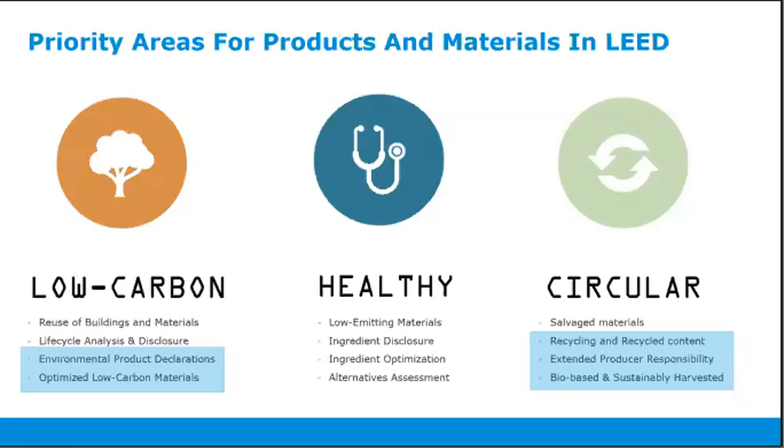Additionally, another way to reduce embodied carbon in a product is by integrating bio-based and sustainably harvested materials. That's not something that we're going to focus on today. That's something that is incredibly advanced, and there are manufacturers working on that. Incorporating bio-based or sustainably harvested materials can help lower the embodied carbon in a product, but it's not always guaranteed.

We'll talk about LEED v4 and 4.1 for just a moment, because this data is absolutely incredible and encouraging at the same time. So understanding that interest in green building has continued to grow over time, we ran a quick analysis just to see what LEED registered and certified products look like from June of 2020 to June of 2021. And what's interesting to see here is that during the heat of the pandemic, when there was a lot of uncertainty and ups and downs within the industry, that's when registered projects for LEED v4 went from around 9,000 all the way up to around 15,000.

And if you look at LEED v4.1, the registered projects between June of 2020 and June of 2021 shows that we went from 620 buildings to almost 4,000 buildings. So we're looking at roughly 9,000 new registrations in a year for LEED projects, which is incredible, especially given the ongoing situation of the world we live in right now.

Something else that's interesting about LEED project teams is that we're seeing a lot more utilization of substitution for credits in v4.1 versus v4. And optimization of products as well as EPDs are two of those key credit substitutions, and we're going to talk about that in some detail.

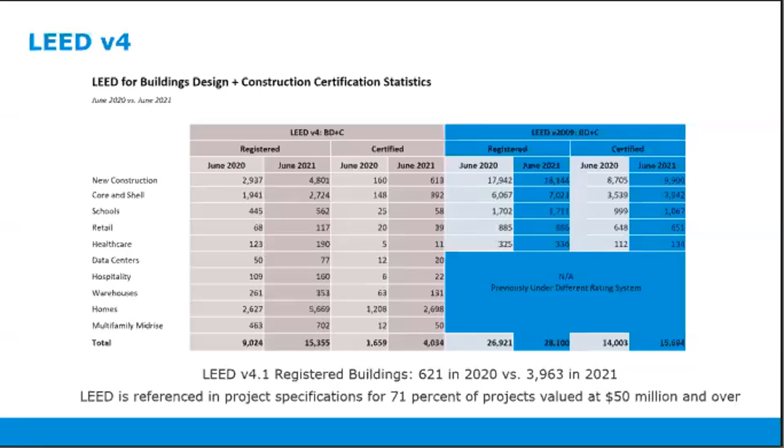So the intention of this course is to talk about embodied carbon, and those that are familiar with this topic tend to be a little bit more advanced as far as LEED is concerned. So we are going to get into some detail in the next couple of slides. It's a lot to take in, so stick with me here, okay? We're going to dive a little deeper into LEED. And these are not your typical LEED v2009 contributions of what we're used to seeing for those past years with 2009. So we're continuing our discussion about driving a more sustainable product.

And this is beneficial because it's encouraging manufacturers like ASSA ABLOY and any other manufacturer within any number of CSI divisions to create environmental product declarations so that architects, designers, and building owners can start to really understand the impacts of products.

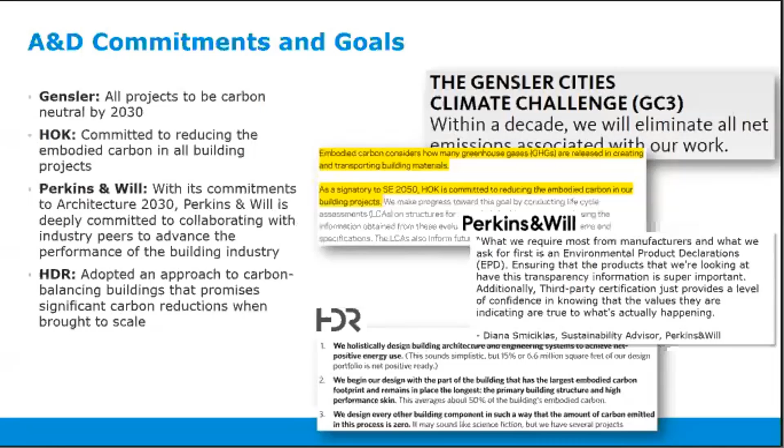And that was from a lot of manufacturers saying, hey, we're starting to do this good work that you proposed to us, and we're answering the call. And so we'd like to make sure that we're collaborating effectively with all of these firms that had asked us to make these positive changes within our products and our processes.

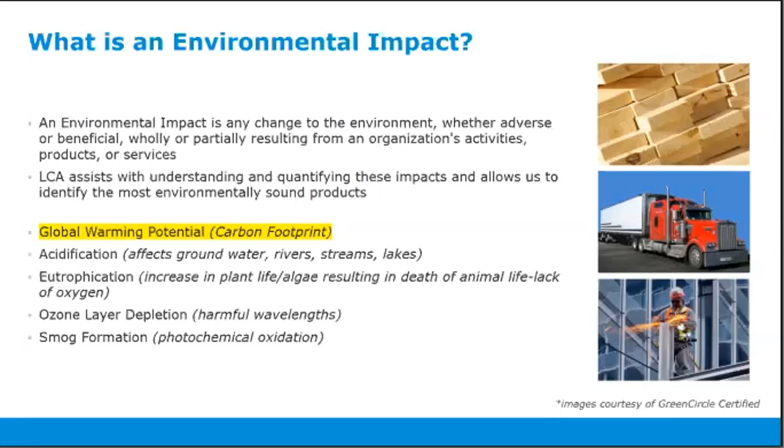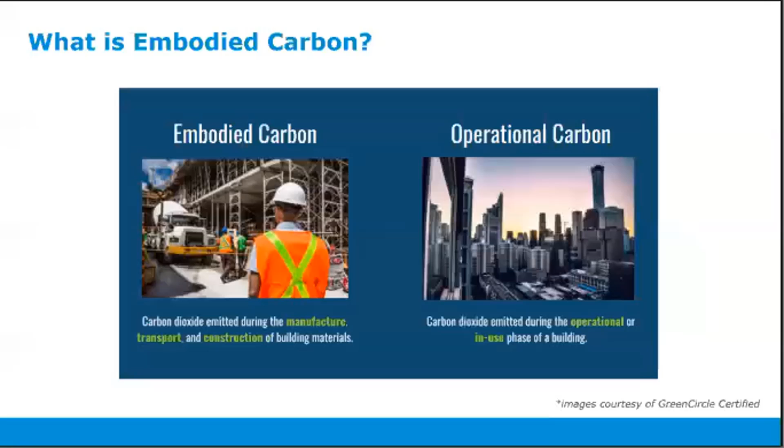So what is embodied carbon, right? We have for a very long time focused on operational carbon, which, especially with LEED, we knew we had to measure the footprint of the building when it's in its operational or in-use phase. And now what we're understanding and what we need to know to move forward to be more responsible is that embodied carbon, or the emissions that come during manufacture, transportation, and construction of building materials, is something that we need to focus on as well, and it can have a very large impact.

So this is a very helpful illustration of the overall life cycle of a building. Depending on the type of role that we have within the project process, we may have a tendency to focus on one more than the other. If you're a supply chain person, your daily focus is on raw materials. If you are an engineer, you're focused more on manufacturing. If you're a building owner, then you're thinking about the product in its use phase.

So everyone's going to serve a different role, but with LEED v4 and 4.1 and a focus on embodied carbon, we're getting to a point where we're saying, okay, we've got to kind of come out of our silos and say, how do we understand what the impact looks like throughout the entire life of the product? And how do we work together to make sure that we can reduce that?

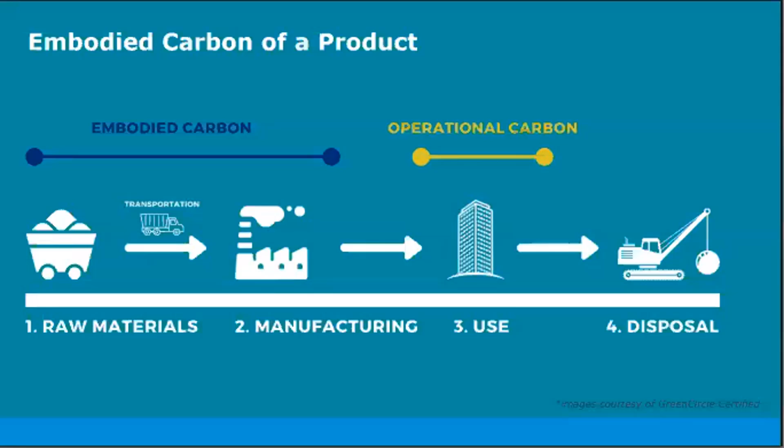So one thing that we can do to help reduce embodied carbon in our products is to source raw materials from a closer location. That we can appreciate is obviously easier said than done, but it's something to take into consideration. Suppliers change all the time, and there are options across the country and the world. It's also important to use renewable energy in manufacturing processes. That helps to reduce impacts and energy used in our plants.

It's also important to think about integrating recycled content, dematerialization, or just making the product smaller, reducing the footprint of that product overall, and then also reducing the packaging. We've all gotten things sent to us online, ordering of some sort. The product is this big and the container it comes in is this big. So let's think differently about that. And then also let's think differently about how we're recycling or disposing of that packaging.

That's how we kind of set the bar higher for products. And we as manufacturers, it's really helpful when we are pushed by the A&D community, building owners, distributors, installers, to say we're working towards more stringent embodied carbon reductions, and we want to work with manufacturers that are helping us to design, in the long run, a much more sustainable and efficient and responsible building.

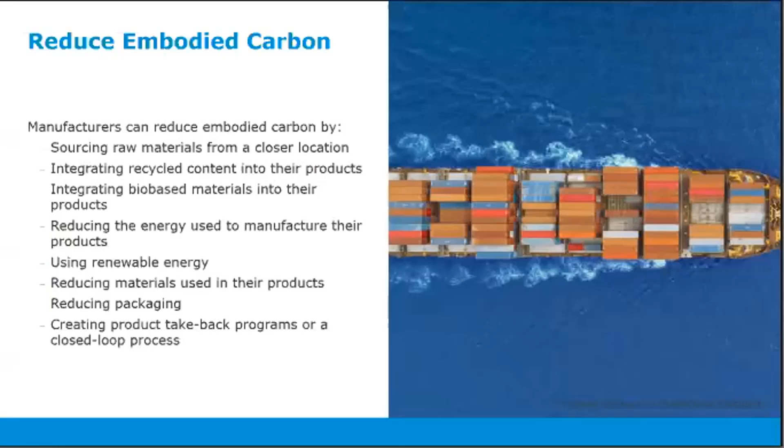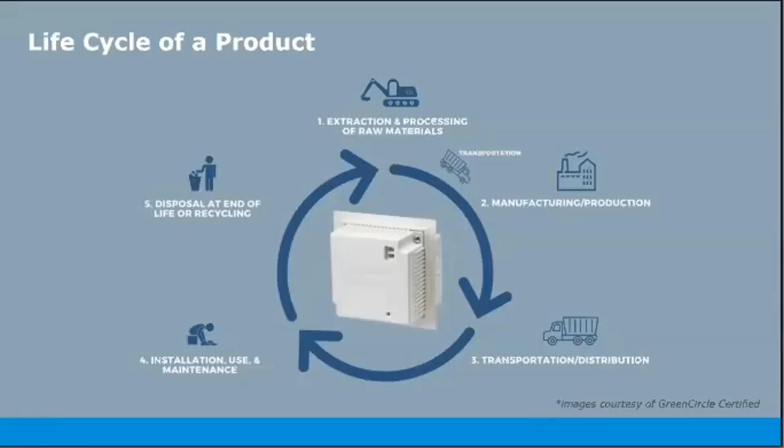To understand the full life cycle of a product, we will use one of our power supply products as an example. So this is our EcoPower power supply. And it's interesting to note here that when we're looking at the life cycle of a product, every product starts with extraction of raw materials, and then finishes with the eventual disposal at the end of life, or recycling, with the intention of being able to divert from landfill. So no matter what type of product, commercial, institutional, or consumer, this is typically the type of life cycle that we're going to be a part of.

So how do we use the information from a life cycle assessment? This data is very important, and it is a great tool for architects and building owners to understand and select more sustainable products and materials. So typically when we're doing our product research, you're not going to see an LCA necessarily as the documentation, but you will be able to review that information within the environmental product declaration.

So it's great as a research tool for customers, but it also allows the employees on our team within our organization to understand all of our environmental impacts, so that we can implement changes to make our products and operations more sustainable. So it is a tool for optimization on the manufacturing side as well. And the great thing about the availability of all this additional data is that we're getting smarter about how we're mining it and utilizing it. So a transparency tool that's recommended is the EC3 tool. Many of you have heard about this. It's an embodied carbon calculator, as you might have guessed.

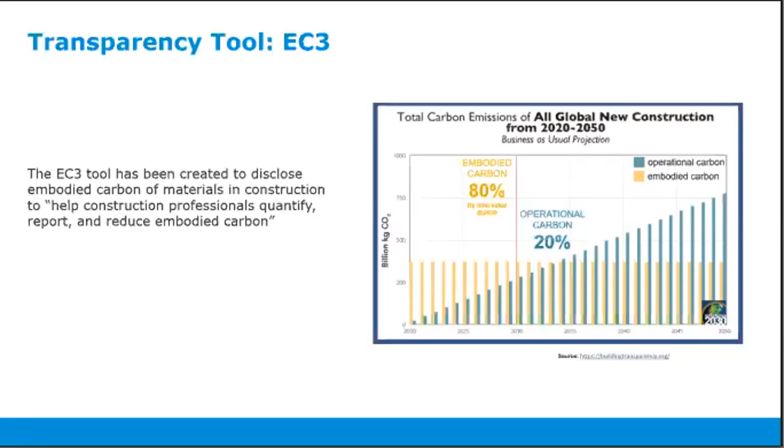The point here is it's really important to be thinking about driving down embodied carbon when you're selecting products and materials in combination with optimizing the building to reduce operational carbon or energy during the whole life of the building. This story around embodied carbon makes a lot more sense when you see it mapped out like this. The EC3 tool pulls information from EPDs and includes it within the tool so that anyone in our industry, architects and designers like yourself, can make more informed decisions.

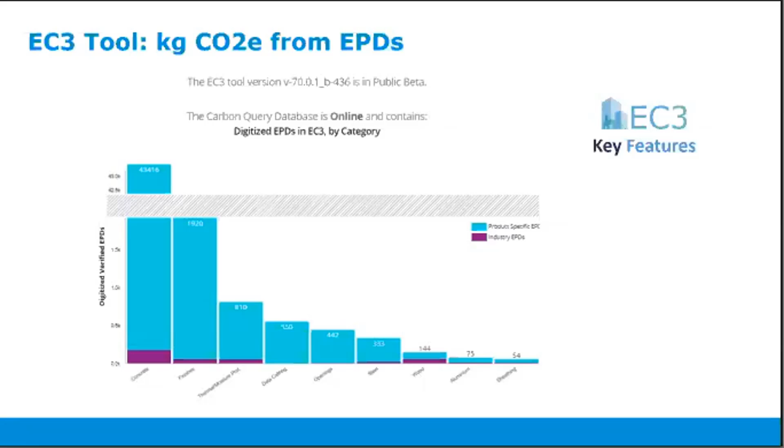So a quick snapshot of the types of product categories that are within EC3. And of course, structural materials like steel and concrete are going to be the most prevalent right now, because they do have the biggest footprint or the biggest potential for embodied carbon. But that's not to say that we shouldn't consider all elements of the building. And so we use a tool like EC3 to get a better understanding of embodied carbon in the product. And I'll show you an example on the next slide.

So in this case, we're taking a look at a handful of hollow metal doors from across the industry, not just ASSA ABLOY, and then also the baseline, which was the Steel Door Institute's environmental product declaration. So this is actual data that was taken from the EC3 tool. And you can get an idea of the different types of doors and their impact. So you've got the baseline with the Steel Door Institute.

The important thing to understand here is that just like with any other type of transparency tool, like a health product declaration or others, this is not the end all be all of your decision-making or your research. It's good information to an extent, but you're not comparing apples to apples because these doors could have a heavier or thicker construction. They may have a different type of core, depending on the guidelines of that building that are needed, or depending on maybe the efficiency or the types of standards that they're following.

So be sure when you are putting products side by side that you've got them as close as far as their attributes are concerned to give you a more realistic comparison when you're taking a look at understanding the embodied carbon of that product. You just want to make sure that you're doing a fair comparison.

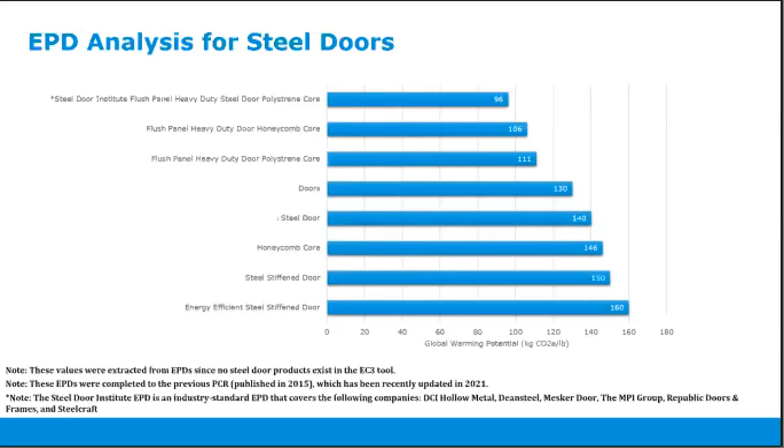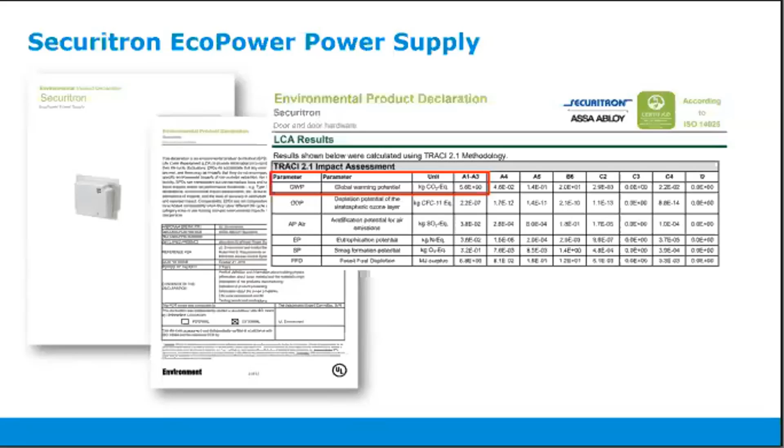And this is just a quick snapshot of what you might see in an environmental product declaration. So some of you that are heavily involved in LEED projects, you probably read EPDs very quickly. You know exactly what to look for, and you're familiar with the LCA table here. This is the type of data that's going into the EC3 tool. So if you are not using the EC3 tool on a regular basis, you can also get an understanding of embodied carbon from this LCA page within the environmental product declaration. So you've got a couple of options there.

We'll talk just briefly about what a sustainable product actually is. We mentioned before, we talk about sustainability in many different ways, and there are many different terms. Sometimes it's eco-friendly, sometimes it's green, sometimes it's sustainable or energy efficient. Historically, when we think about a sustainable product, a lot of people think, oh, it's just something that has recycled content or the product saves energy.

It's really important to take a multi-attribute approach when we're talking about what defines a sustainable product. Because the industry has become so progressive, you really need to tie a lot of attributes around that product to qualify it as sustainable. And this is a great example of what we might consider a sustainable product. And that is because it has a multi-attribute label tied to it. So the product here is certified by Green Circle to have a certified energy savings as compared to a previous generation. And as architects and designers, you'll want to look at products like this from multiple perspectives.

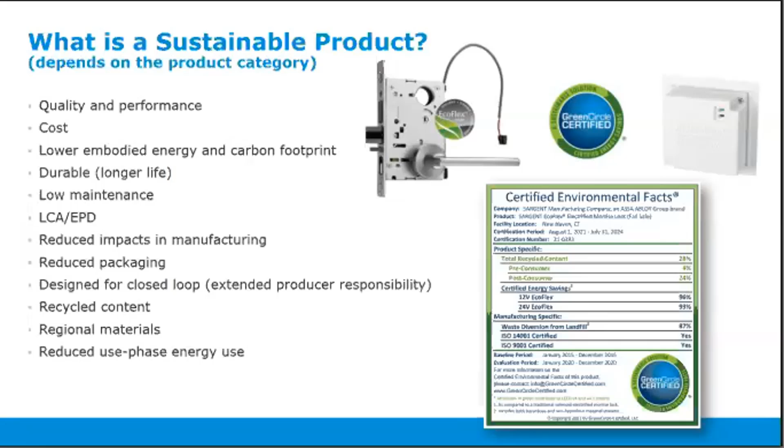So you'll also want to understand the information around a manufacturing impact and many of those other pieces of information that you see there. Is it low maintenance? Does it have an environmental product declaration? Has the packaging been reduced? Are we taking a look at recycled content, which still does come up? And then, of course, our favorite and the theme for today, which would be lower embodied energy and a lower carbon footprint.

Sustainability by design. This is one that is tough for a lot of manufacturers and proves to be a good challenge for us. And within ASSA ABLOY, we utilize a sustainability compass to help us outline the sustainability vision for individual products from the very beginning. So we take a look at raw materials, end of life reusability, recyclability, in-life energy consumption, carbon footprint, and financial cost.

Understanding these impacts at the early stage of a product development process gives us a better idea of comparing sustainability implications of different designs so that the product goes to market as the most responsible product it can be. And our internal compass, sustainability compass, helps to do that.

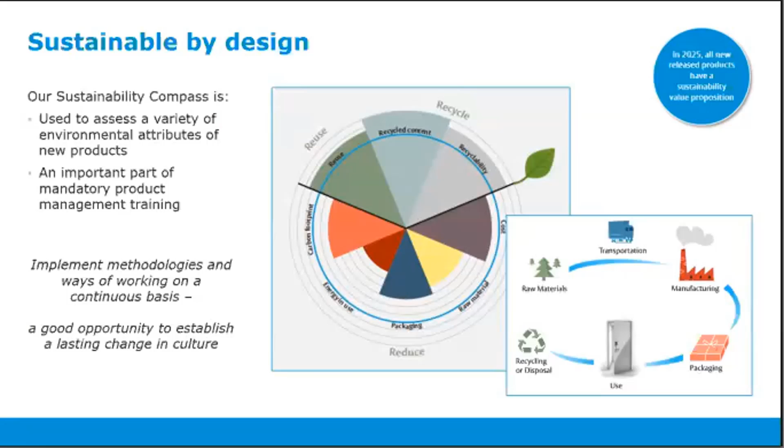So this is an awareness tool that says, if you don't make the right choices in the early stages and manufacture these products, it's really hard to go back and redesign and try to reduce an impact later on. So this is just a great example, and you'll see many manufacturers working with tools like this to bring more responsible products to market, especially knowing what we know now about the way that we can be responsible in making reductions in raw materials, cost, footprint, water, and then of course, understanding what happens to the product when it reaches the end of its life.

And this is another just quick example here of what sustainable product innovation actually looks like. So many deliberate steps, and you saw that with the compass as well. But if we can design a product to have a reduced impact in its life cycle, that is a huge step forward. And as you've seen with those much more stringent demands with LEED v4 and 4.1, this comes into play with that.

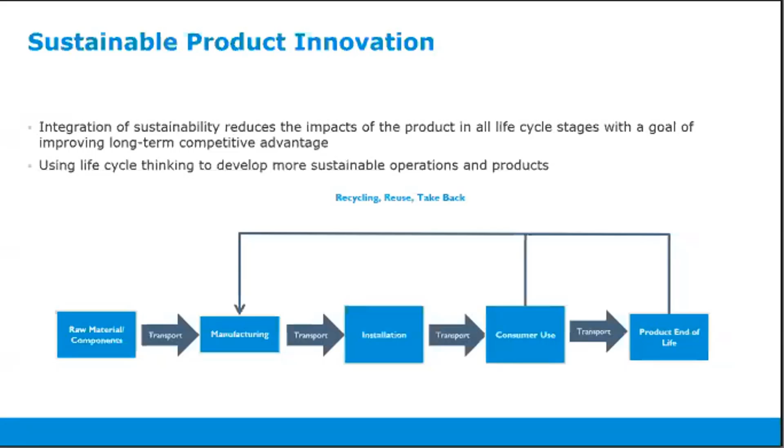So this is a really great example of how we made changes internally to a product. And then we were able to share with the architectural and design community that this product has been optimized, and we've taken what we've learned so that we can apply it to the LEED v4 option 2 credit that I talked about earlier.